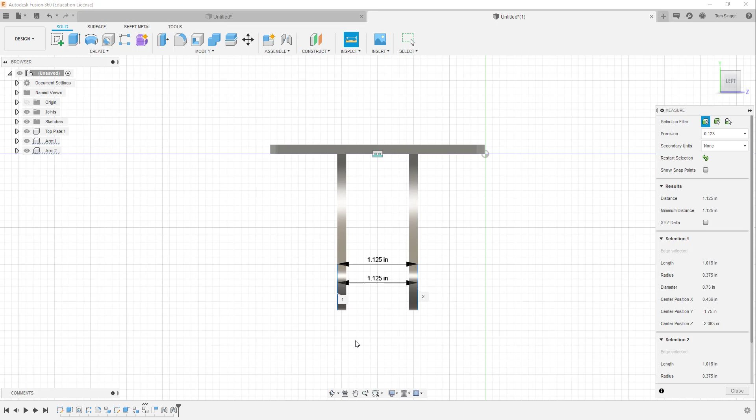Good day. Today we're going to be focusing on finishing up this caster design problem. We've created the top plate along with the two vertical arms.

We have to create the wheel and the shaft, which won't take long. Add those into the assembly, and then we're going to walk through the process of exploding the assembly and creating some detailed drawings, potentially in a third video as this process goes on.

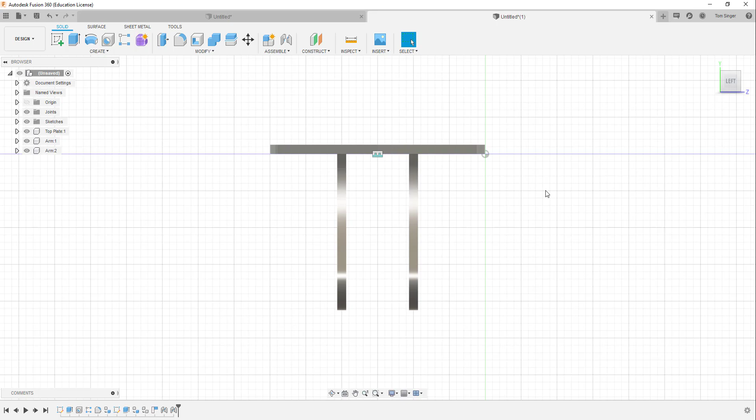Alright, so we have to create the shaft and the wheel. Creating the shaft is actually going to be somewhat easy. We're going to create a new sketch on the side of this object. We'll create a circle based on the other circle.

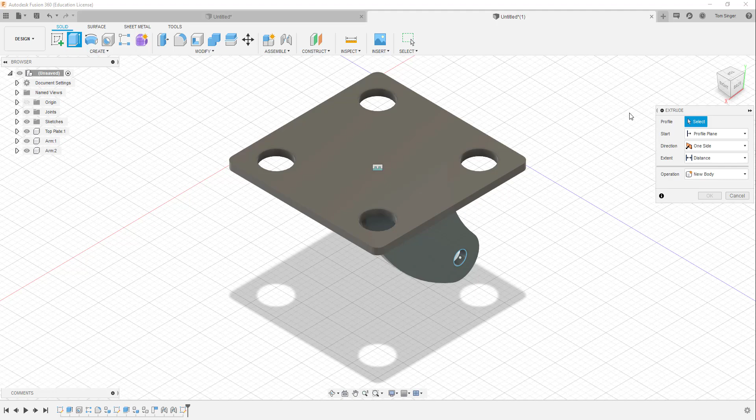Let me flip this around so we can see it. So now we've got a circle that's been created on this arm. We're going to finish the sketch. We're going to do an extrude, but what's unique about this is that we are going to select the circle and select the direction of extrusion.

Since I copied it, copied that. Nice, so that is pretty interesting. Since I made this as a copy, it took that same feature and copied that. So we have to back this up. Things don't always work the best way.

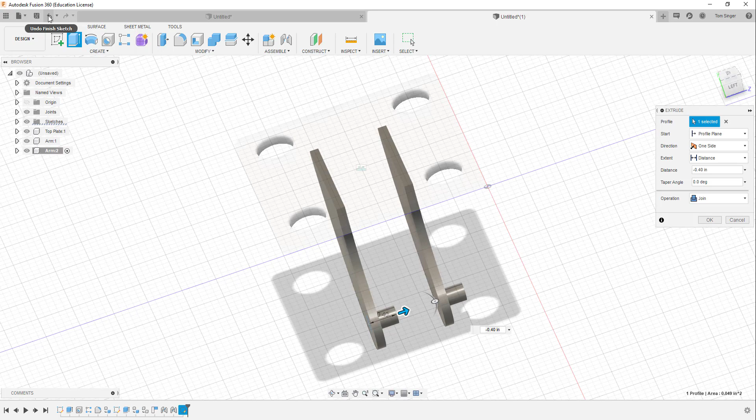So what we're going to do is, instead of creating a sketch on that object, we're just going to draw a circle out in space and dimension it 1/4 inch.

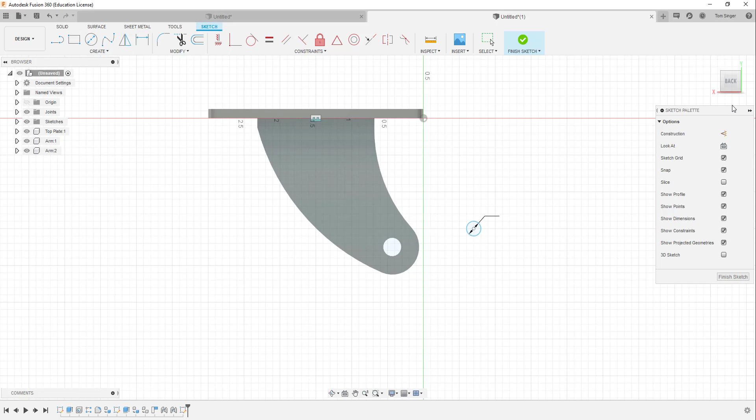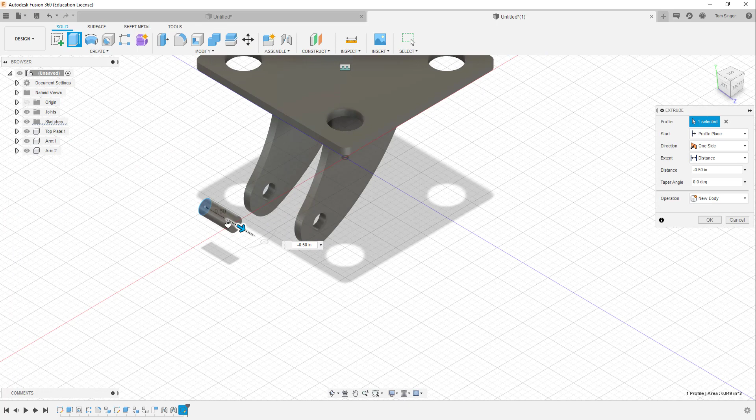And as we create our object here, there we go. We know that this is... well, we're not sure, so let's hit the inspect button. We're going to inspect it from this arc to this arc, and it's 1.125. So we finish the sketch, we extrude the circle, comes back negative 1.125.

Boom, so now that's an object as a body. If you want, slow click on the body, we'll call that shaft. And then we need to convert this into a component. So now the shaft is a new component.

And finally, we've got one more object to create, which is the wheel. So I'm going to create a vertical object, the wheel, just draw it off to the side here. The wheel has a diameter of 2.5, and it has an interior diameter for the shaft at 0.25.

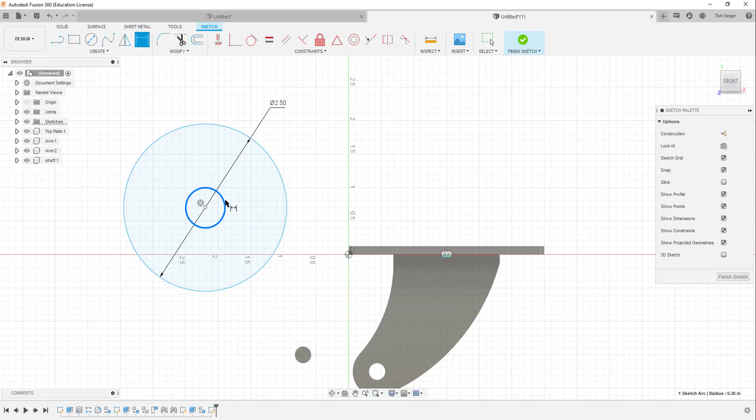And we're going to finish the sketch, and we'll flip it around to the 3D view, extrude this. The extrusion of this is 3/4 of an inch, 0.75. Okay, so it's pretty basic.

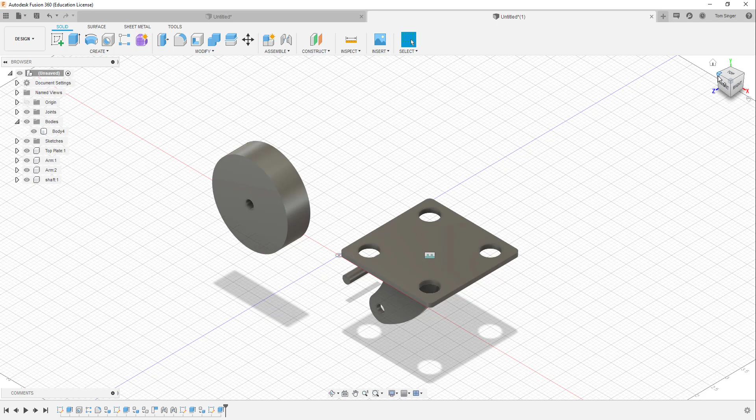We could chamfer the edges and make it a little bit cleaner, but the whole idea is it's just a basic object. But it's not an object that we can assemble yet because it's still considered a body.

So again, we're going to call that wheel and create a component for it. So now that it's a component, it can be moved around.

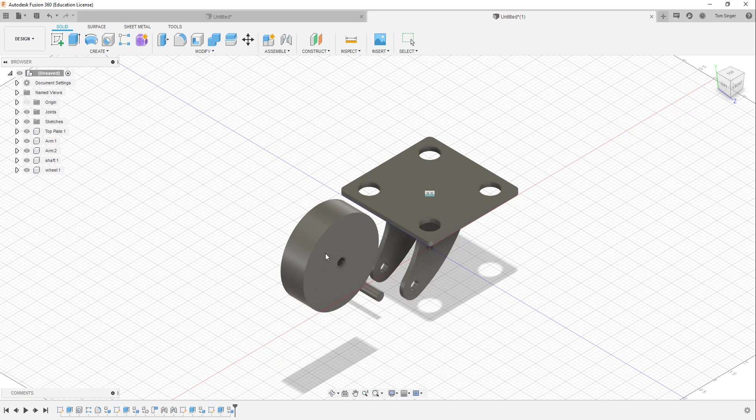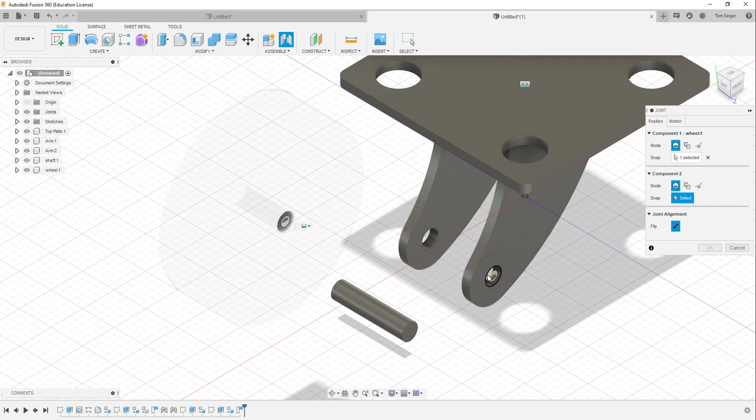Okay, so again, aligning and constraining. We're going to create a joint and capture the current positions. So this point on the wheel is going to be connected to the interior side of right there.

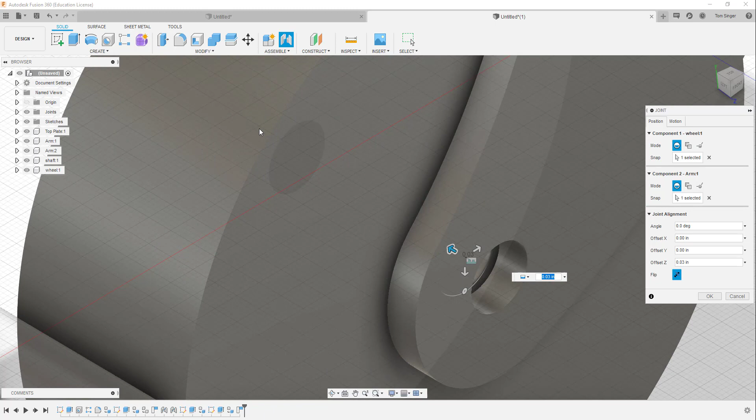But we need to offset it, which is fine, and we'll get to the offset here in just a second. So those two are now connected, but we need to offset it. Let's see here, it's 1 inch, 3/4, and 1/8 inch on both sides, so 0.125.

And if you want to check it, we can look at the left side view here and confirm, an 1/8 inch is too far. So instead of an 1/8 inch, it needs to be a 1/16 of an inch, 0.0625, which gives me an equal gap on both sides.

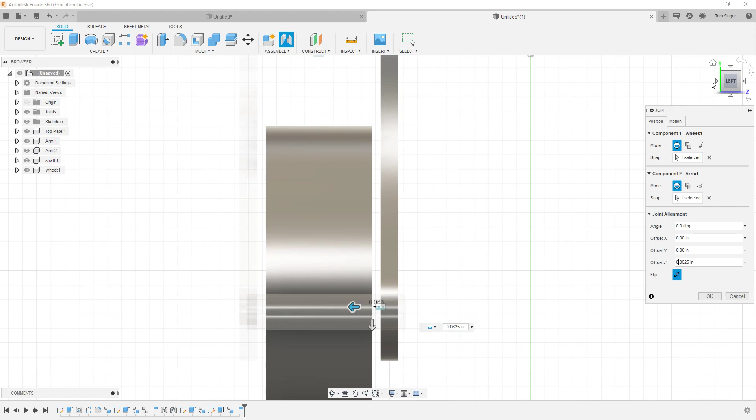So again, changing your view is really important so you can see exactly what's happening here. All right, I like that. We'll choose OK. Now the shaft.

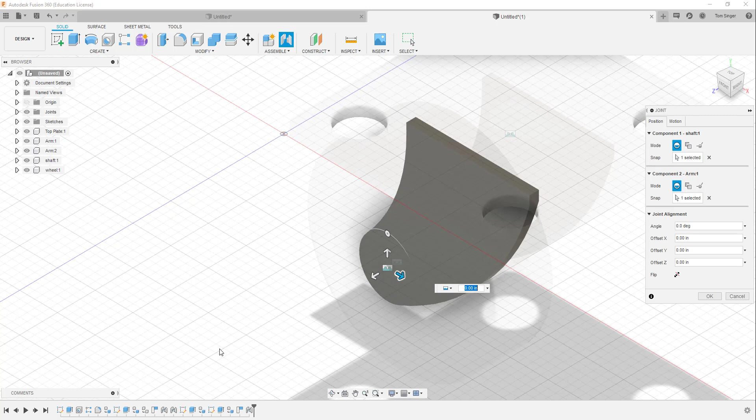Same scenario. We'll use the joint command, highlight the end middle here because we know the shaft will go all the way through, and it connects in and it's rigid. If we flip to the other side, we should see that it goes all the way to that edge also. So it does.

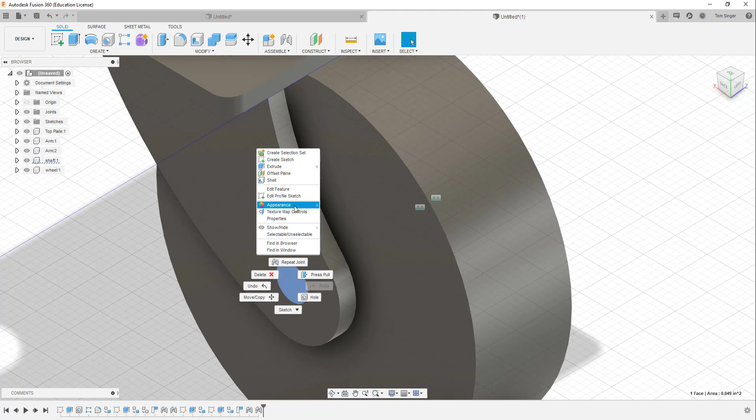So a couple of things. Number one, we can change the appearance of these. We can either change the properties and materials, but realistically we can just change the colors if we wanted to. In this case, we're just going to use some glossy paint colors here.

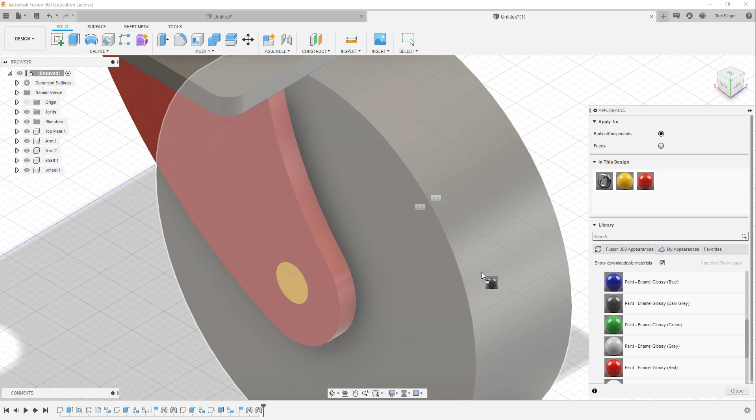We'll make that yellow. We'll make those red. Dark gray on the wheel. And we'll leave the top gray.

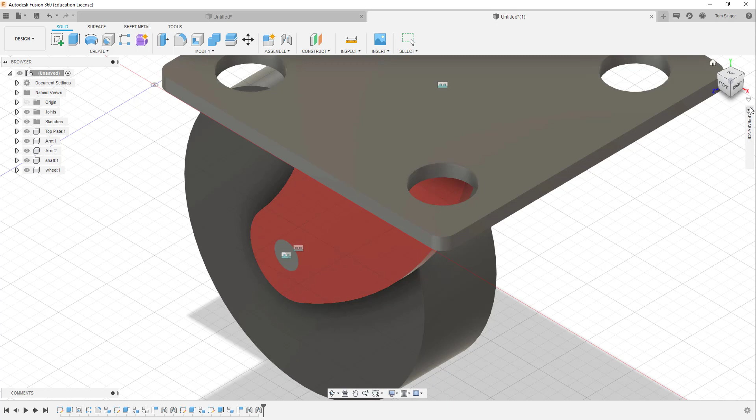All right, so now we've dressed it up. We've given it a little bit of color here as we go along. Oh, so yellow didn't hold. So why didn't yellow hold to both? Did it just apply it to the face?

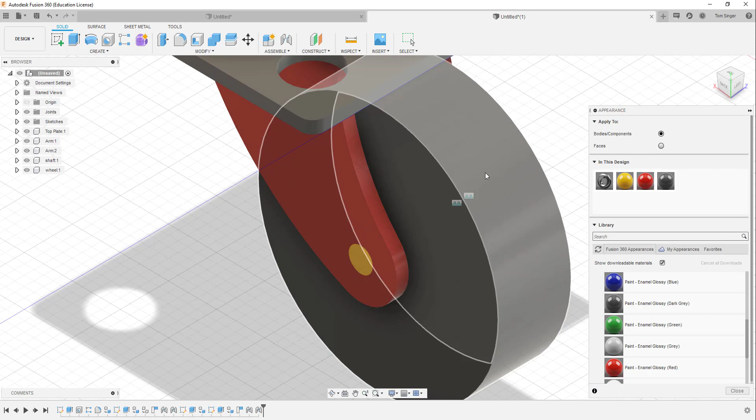Remove appearances applied to faces. Yes. So that should now be applied. I only applied it to the face as opposed to the object. So there we go. So we have the yellow shaft and the darker objects and so forth.

So we're all set. Well, congratulations, we're now done. Make sure you hit the save button. And that's one thing you want to make sure, that you save often. Now, granted, the nice thing about Fusion is that it does do automatic saves for you, but at any major juncture, you want to do the save command.

All right, now that we've saved it, let's talk a little bit about creating a drawing. And then we'll deal with the exploded view drawings also. Actually, let's do the exploded view first, and then we'll deal with the drawings.

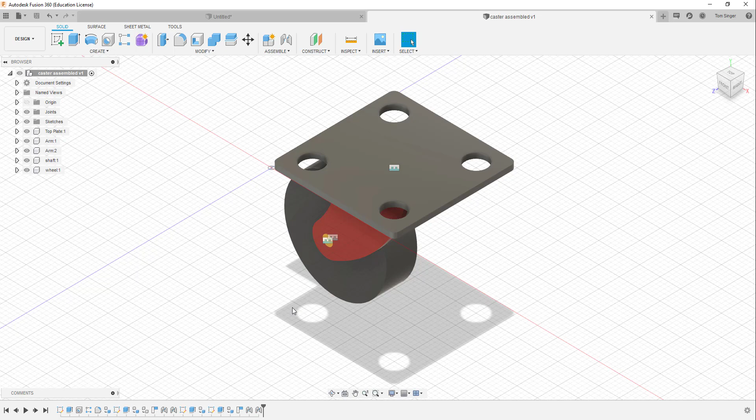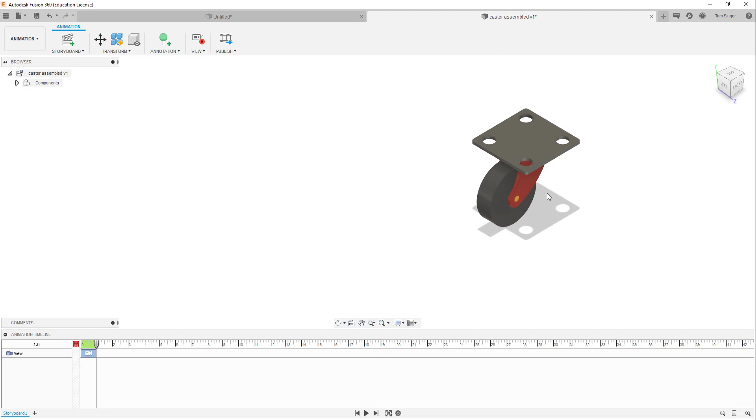So like anything within Fusion 360, we have different tools to use. In this case, we're going to use the animation tool to create the exploded assembly. The animation will have our tools at the bottom, and what we're going to have to do is figure out how this object will be disassembled. That's really important because you want to disassemble the object in the order that you'd expect it to be assembled in.

So you have to think through the manufacturing process, the assembly process in the manufacturing. So in essence, we want to move components. We have a storyboard that's been created here, and we can go ahead and move. I want to select the shaft. I want to pick the shaft because that's going to be the last thing that gets placed is the shaft. We're going to move the shaft.

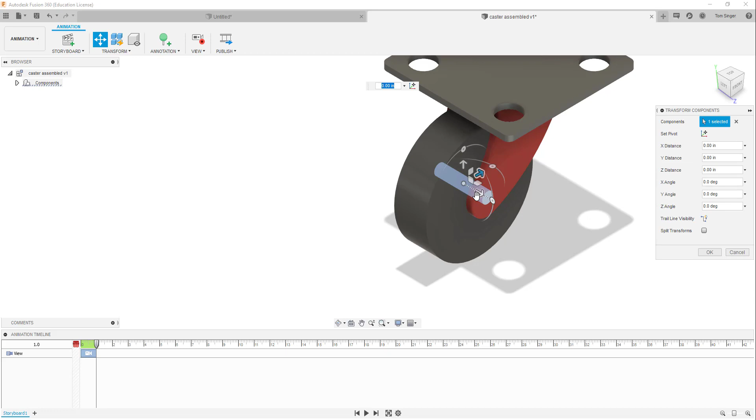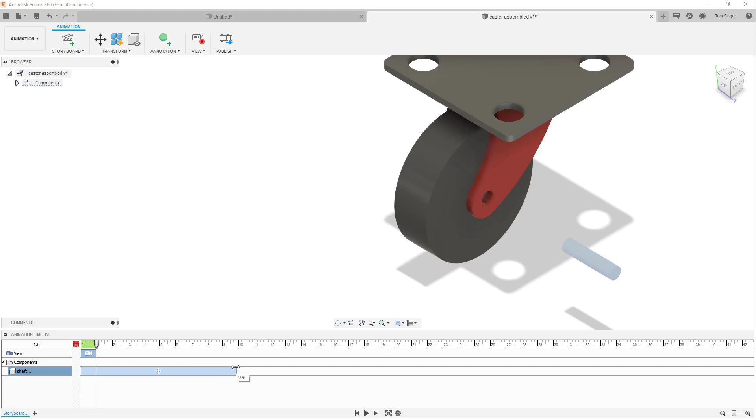So that shaft, I can grab the arrow that we want to move it. I'm going to go ahead and move this shaft, and we'll say we'll move it 3 inches. I like typing in the distances so they're exact. So we'll choose OK. You'll notice that the shaft now has a move component, and it took like 1 second, which is horrible. So we'll say that it actually will take a total of 10 seconds to move the shaft out instead, and as the shaft moves out, it takes 10 seconds.

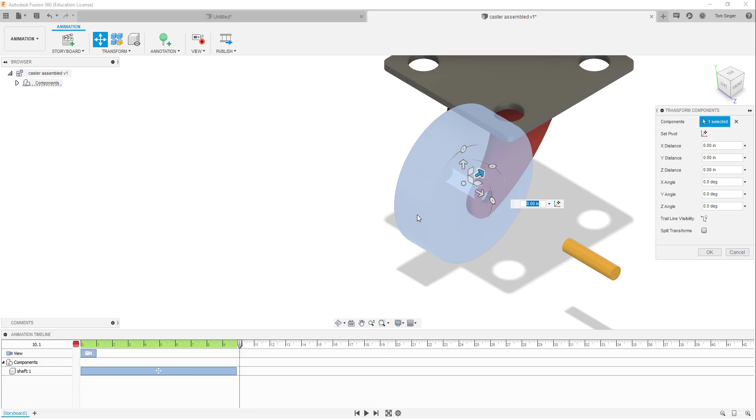The second component that we're going to move is the wheel. So again, we'll choose wheel, we'll choose move, we'll select the wheel. And now I've got to pick XYZ movements. I know that the wheel can come straight out and then go down. So we'll back this off a little bit, we'll make the wheel come out, and we'll say that goes a negative 2.5. And then we'll have it come down a negative 2.5. Whoops, too many points. 2.5. Perfect. And then we'll choose OK.

Notice that the X and the Y distance is being recorded, so it's going to come out and down. The thing is that this is going to move diagonal because it's only one move. If we want to do two moves, we'd have to move it one direction, stop, move it a second direction. If we want to move it diagonal, I can do it all in one.

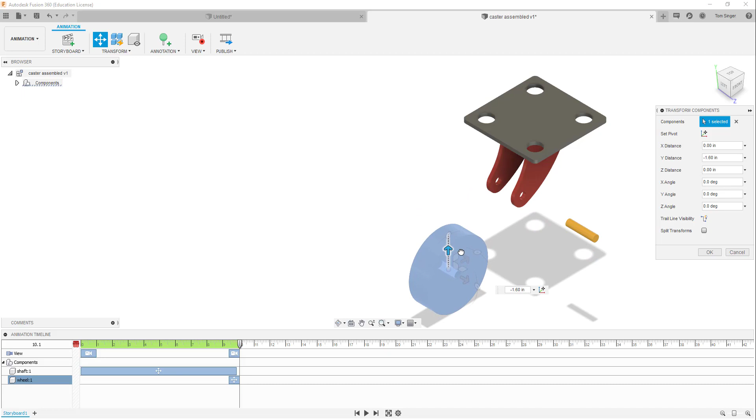So I actually want to do it in two separate steps. It's X direction first at 2.0, and we'll choose OK. And now we'll move this wheel again in the Y direction, negative 1.6, and choose OK. So why did I want to do that? Well, the wheel, we want the wheel to move after the pin gets pulled.

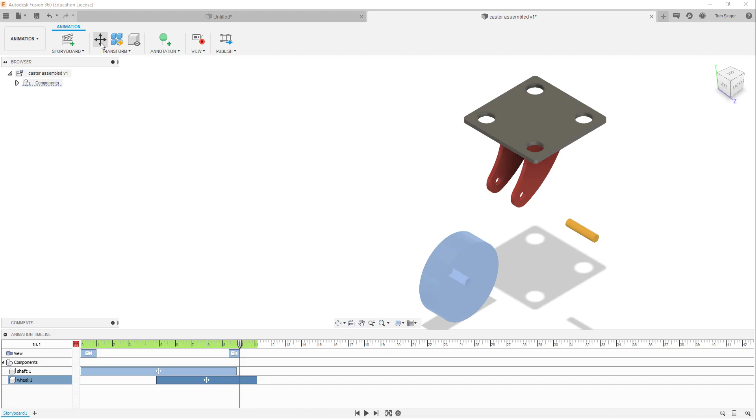And it might extend longer. As you can see on the storyboard, I'm able to change the sizing and the spacing. Now these arms, theoretically, are welded to the bottom of the plate. However, we could actually move those also.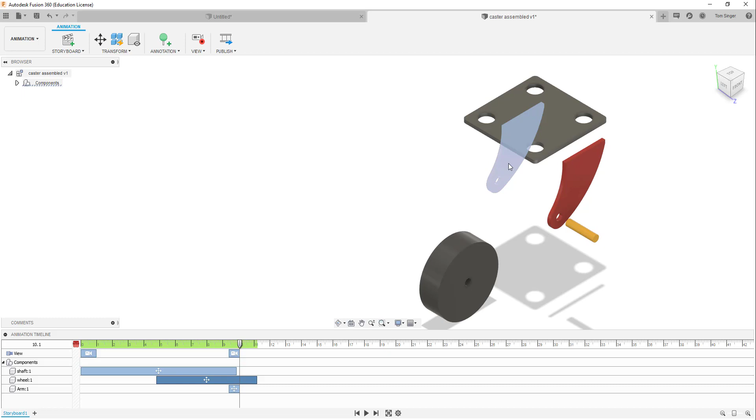So we can grab the arm and move it out, or move it back. If we move the arm out, we can move it out 1.5 inches. And we can move this arm out 1.5 inches negative.

And so when we look at it from the front view, everything's exploded and has their space. From the isometric view, we have a pretty good view.

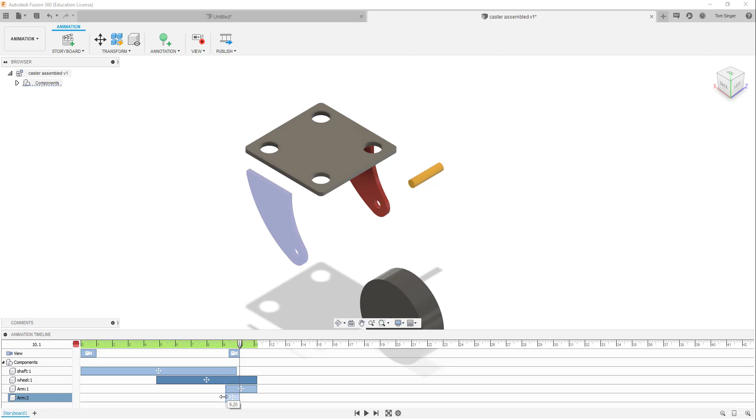Now in the storyboard, things are kind of jumbled up here because the arms aren't moving and the wheel's not moving, but we can't move the arms until the wheel is out of the way. So you have to think about that and how long it may take the arms to move.

And you kind of want things to line up as you do this. You can actually play this from the beginning. It's all assembled, hit the play button. So it spins, comes out, those come apart, and then that explodes. And with the different camera views, you can see I've got two different camera views set up.

I noticed that I can start the arm movement earlier. And I could probably even shorten the wheel movement back. And I can move these back. Let's see how this looks.

So what you're doing is creating a video of how this thing gets exploded. And that video is one of the tools you're able to use as part of the animation. Alright, so let's try this again.

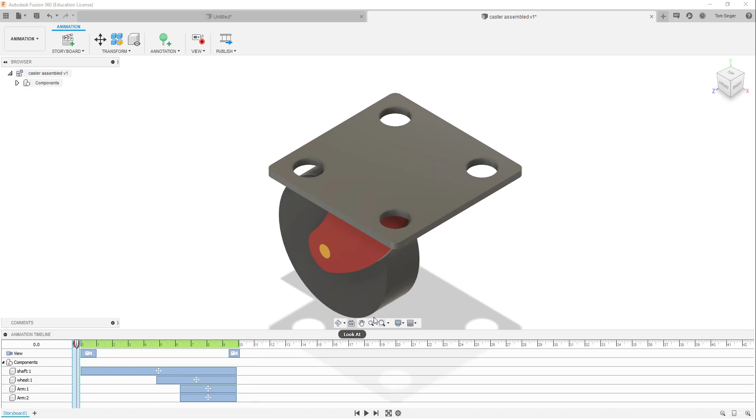We'll slide this all the way back, start play. Have a camera view so it spins it around so we can see it. The pin's coming out, the wheel's moving away, that's moving perfect. So that looks really good.

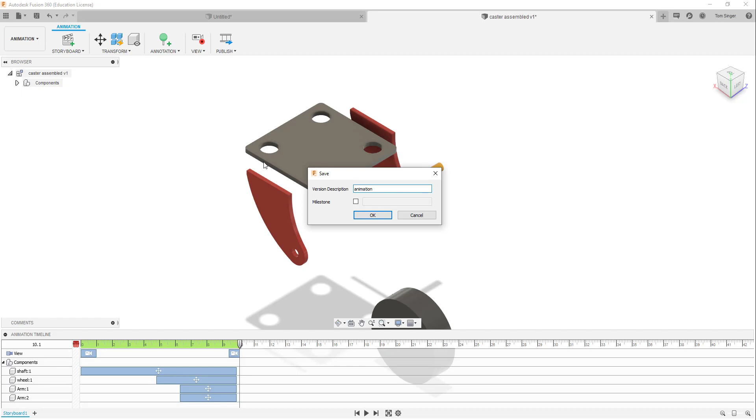So now we've got our animation. Again, hit the save button. We're going to call this animation as our user save. So now we've got the animation with the exploded view of the components, and we have the assembled view of the components in the design.

So now the third thing we have to do is create drawings. Notice that we have two options: we can create a drawing from animation, or we can create a drawing from a design. So let's first create a drawing from the animation.

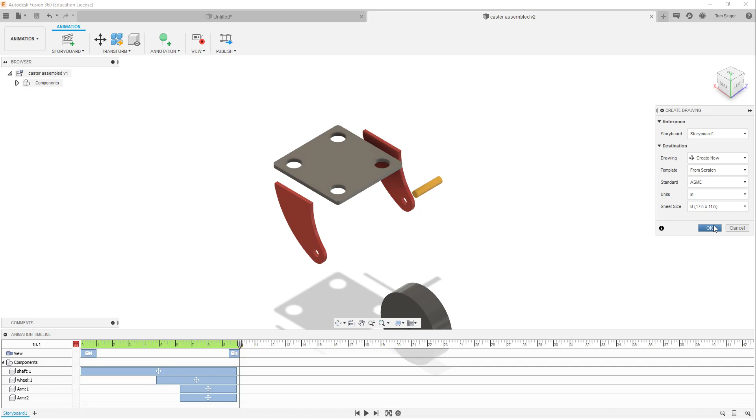So storyboard 1 is what we're working on, that's what this is called, storyboard 1. The template is a scratch template. It's a new drawing, it's a B size, and the units are in inches. Its ASME is the standard for the dimensioning practices, and we'll choose OK.

So now it's going to create this drawing from that exploded view. And there it is. But what if I don't like that view direction or that view angle? Can I manipulate it? Of course you can. I can also make it solid, and I can shade it.

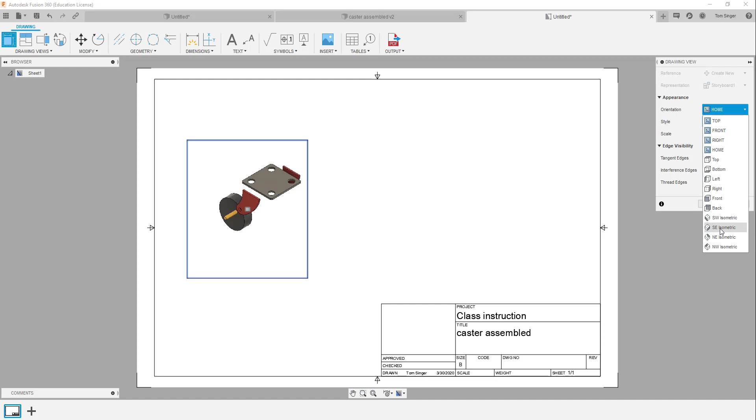Right now it's half scale, 1 to 2. But we have the ability to change the orientation here. So if I want to choose a different direction, that happens to be southeast isometric, northwest isometric. I like that. Now it's still half scale, and I can choose that it's going to remain shaded as part of this option. We'll choose OK.

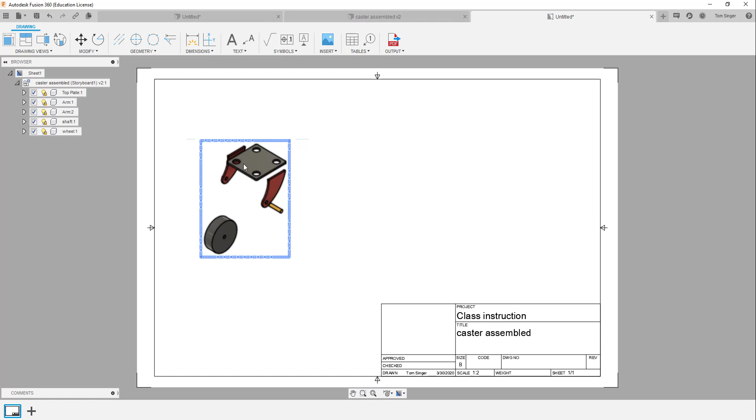So now I've got an exploded view. I can also add additional drawing views to this, so I can add another base view. And this is going to be a model view, but this model view is going to be 1 to 2, and it's not the front. Let's go ahead and create the northwest isometric. Exactly. So now you can see the assembled view and the exploded view all in one space.

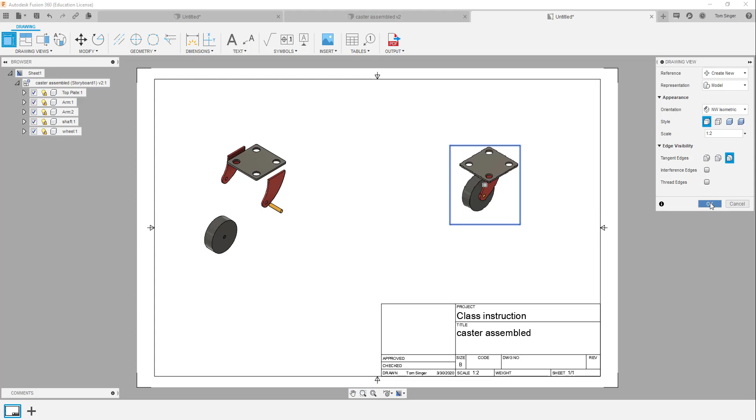Oh, I forgot to shade it. So if we select it and right mouse click, I can edit the view and choose the shading on it.

Now we're going to add the detail sheets. I won't add all of them, I'll just do one. The easiest way is to do a quick add on the bottom, which creates a new sheet for us.

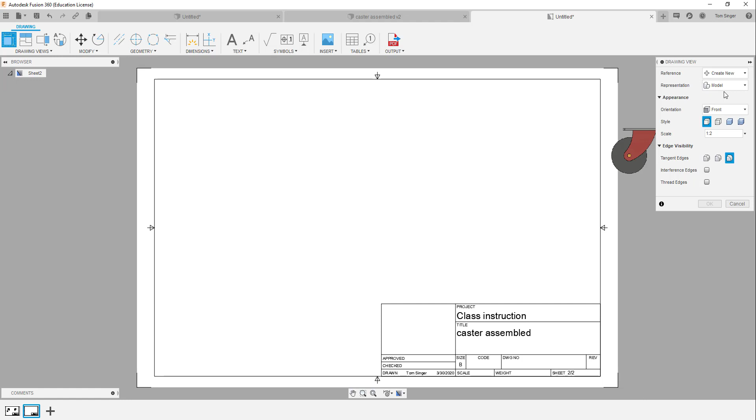What we're going to do is create a new base view. We select the base view, and that base view is going to be of the model, not of the exploded animation, and I'll select the model location.

What's interesting is that I also want it to be full size, so I'll edit the full size, and we want visible edges and hidden lines and so forth. We won't hide or shade anything.

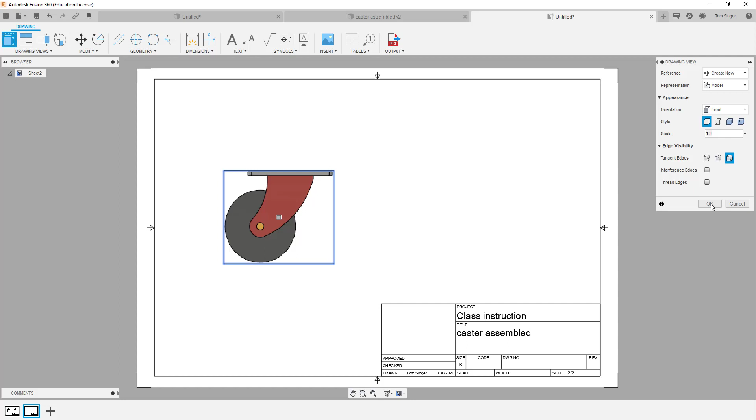At this point students are usually pretty concerned. What we need to do is turn everything off that we don't need in this particular view, so you can see the visibility check marks. We don't need the wheel, the shaft, arm number 2, or the top plate. All we're doing is the arm.

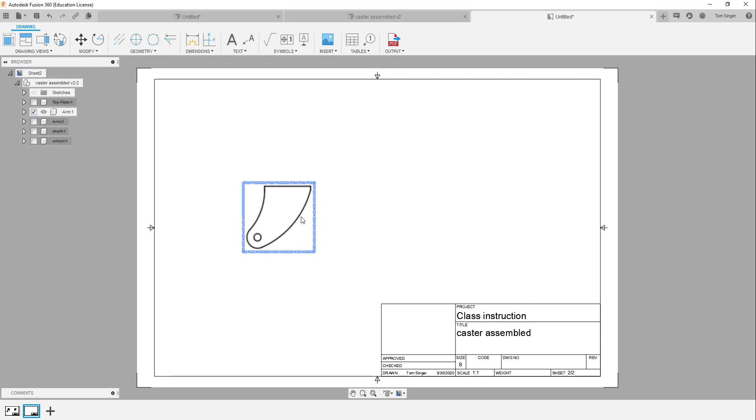Now I can project the arm to the top view, and I can project an isometric view of the arm. Choose OK. The isometric view, I can edit, shade it, and then close.

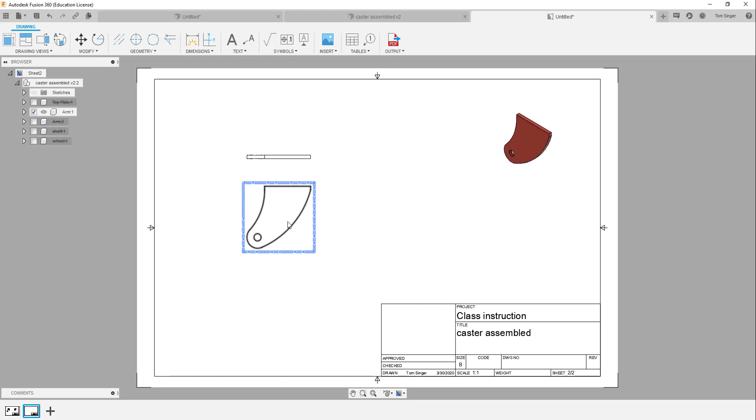I'm now able to put annotation on it, adding dimensions, and there's a variety of dimensions that I can do with this, so I can add radius dimensions.

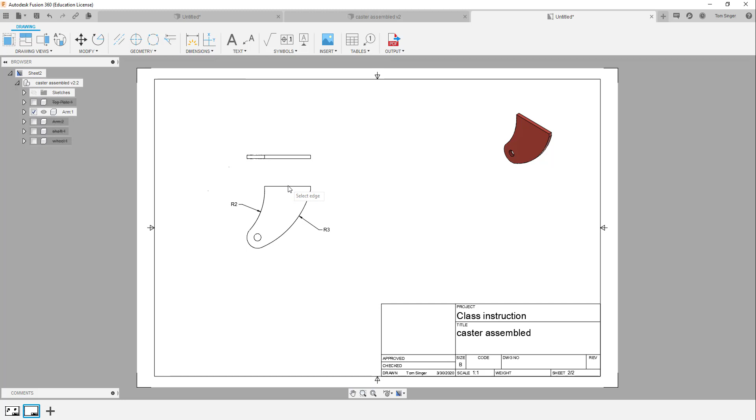I can also add overall dimensions on the part, and then I can put in center marks and use the center mark to help us locate geometry and dimensions.

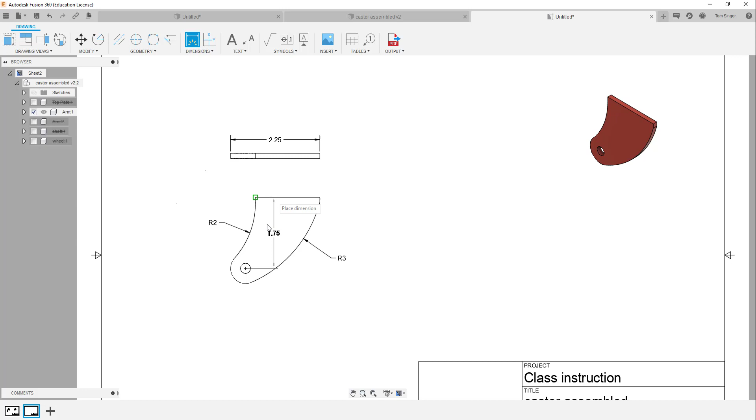So from here to here it's 1.75. From there to the center, we actually need to draw the center line in, so we'll need to draw that center line in.

So you can see how it will work for us. From this line to this line, we draw the center line, and that line is a true center line location. We can drag the edges up.

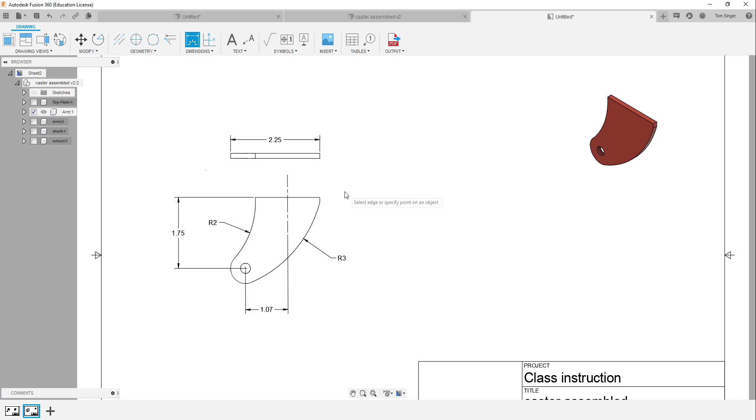Then we can dimension to that center line our values. From the center line of the part to the center of the circle is 1.07. So you can see how you can use that as a tool to dimension and work with.

All right, so the rest of the drawing and dimensioning capability is the basic structure. What I wanted to show you how to do was create one drawing sheet with the exploded and the assembly, and one drawing sheet with a detail drawing.

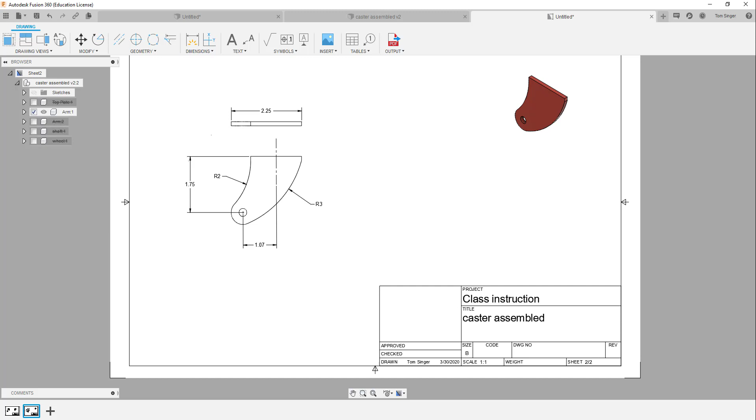Creating the parts list is really simple. Under tables, we'll create a parts list table of the exploded assembly and set that parts list table here. Notice that it automatically places the balloon when we do that. Again, everything's changeable, you can edit and position the balloons and so forth.

So it's a simple process to do parts lists. You can edit the parts list, take out the description, or add a description if you need it.

Again, it's your call. It takes the name of the folder or project that you type in, so be aware that capitalization does matter. It brings your name in, brings in the date, automatically scales it, and tells you how many sheets you're working with. So again, it's a fully integrated process.

When you're finished, you'll want to output your drawings to a PDF. So you choose the PDF option, and make sure you choose all sheets, so all the sheets go out to a PDF file.

And it would be a good idea to export the line weight, so thicker lines and thinner lines are actually viewed properly.